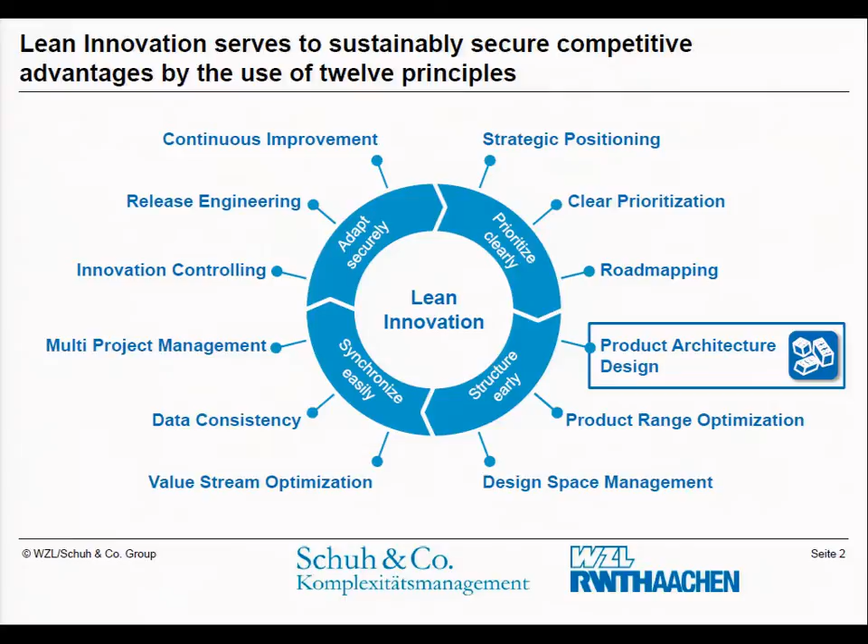Now, the entry picture is probably one all of you can show in your businesses. It's very typical - it's not necessarily a Porsche problem. In a way, it always goes in that direction. When I started my career on this topic with my first research project, in those days Wolfgang Reitzle was the head of R&D at BMW.

Even 29 years ago, he said our topic can't be purely a reduction of variety. We have to be those, at least as BMW, who can provide these more efficiently and effectively. And that is the story since then. As Greg told us already, I'm completely convinced.

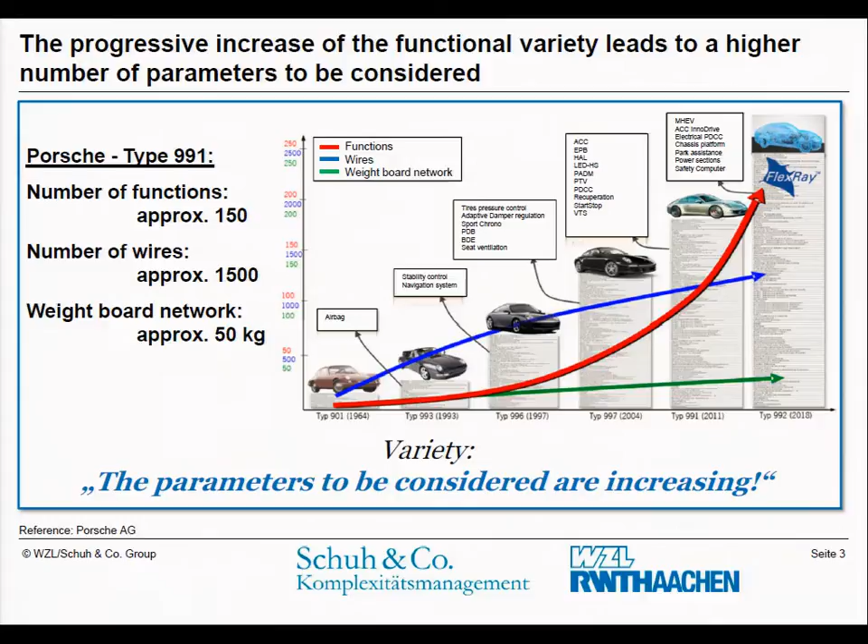That is not only the message for premium OEMs, I think it's the message over all the market. Most of them earn their money with products that are end customer configured, which basically means there is a lot of variety you can choose from. All these figures are not surprising for you, as you are all experts in that field. I have a very similar diagram here, like Greg showed you.

That's what we learned before. A lot of companies still have to optimize that. It's probably been a thing for more than 10 years. And the good ones, like we just learned from Ford, know how to do that. But in my assumption, I'm in that market long enough. 70-80% of the players in the market do not know how to do that, like we learned from Ford Motor Company.

The control of complexity would mean that you really, on purpose, put products together out of modules, and that is the capability to really have a configuration space which is designed on purpose. In our understanding, a new product should always start with positioning in the configuration space. And later on, of course, you need that configurator - first the R&D configurator, and later the market, the customer's configurator. That is very important. The configuration rules in many companies are not clear and completely set. And if they are not complete, you can't say you have control over the configuration space.

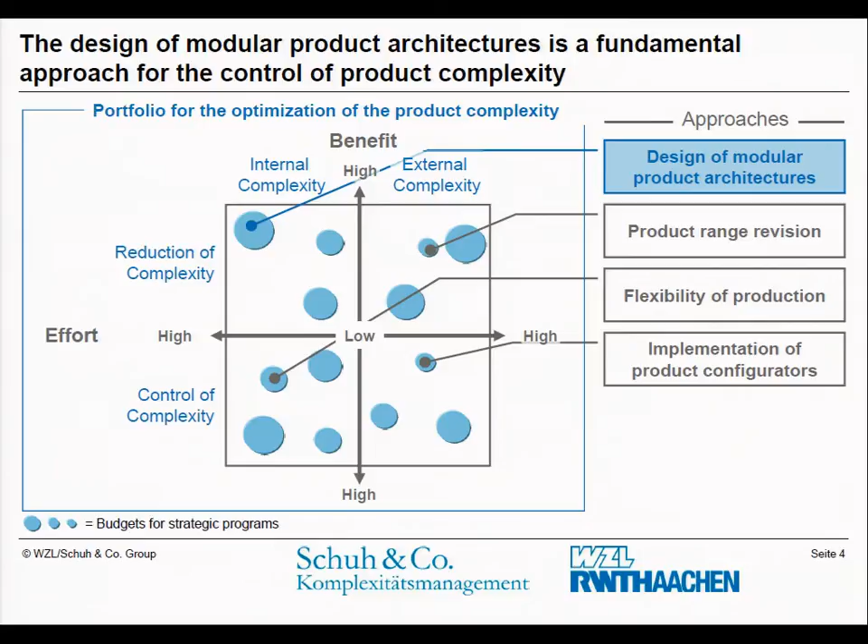Then 2008, 2009, the idea of pure electrical cars came up, and we thought that is a significant technology change which offers the opportunity to really do it properly from scratch. We said, we now build a new product type, and we start not with the first design of the first car, rather designing an architecture. So we designed, or configured, an architecture of cars from a very small one, a 3-meter city car...

...to a 4.6 meter very light vehicle, you would say, very light commercial vehicle. And the important part for us was that we thought an electrical car - citation is Utterback - will not have a dominant design within the next 10 to 15 years.

So that means, to a certain extreme, what Greg said, the number of pieces you can sell from one type of car will be significantly lower than what at least the auto industry is used to have. Very small numbers of pieces and no real scaling up in traditional volumes.

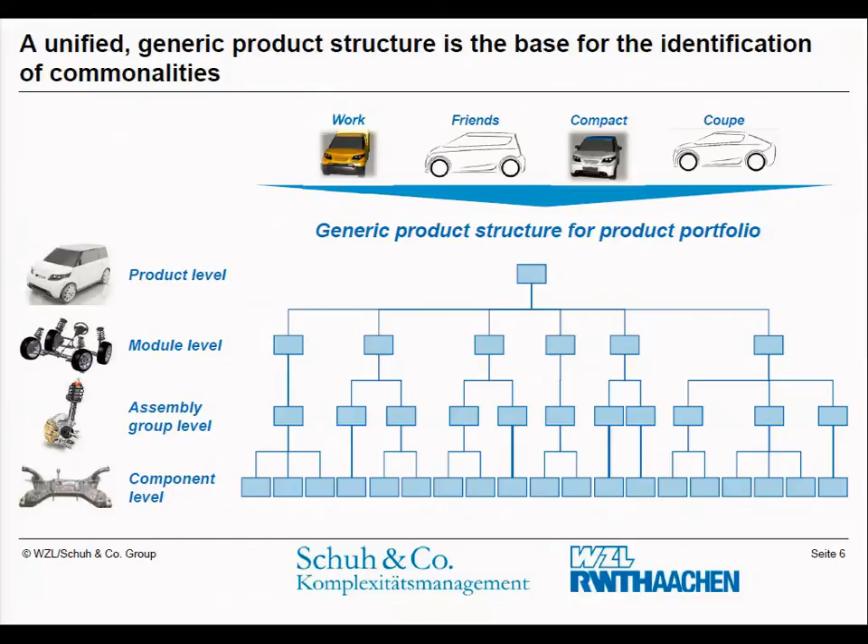And that is even necessary, very much necessary, if you don't start from scratch. In our case, we were kind of forced to start from scratch. And if you do so, we recommend to distinguish 4 types, or 4 levels, of commonality.

The overall, the long-end goal of commonality - physical commonality, having the same parts, having standard parts - is desirable, is necessary. If you can achieve that, very nice. But if you can't, it makes very much sense to at least conclude on the level of technology commonality. So parameters, geometry can be slightly different, but the design and the functionality or the technology you use can be the same, can be similar, can be reused, and that is part of return on engineering.

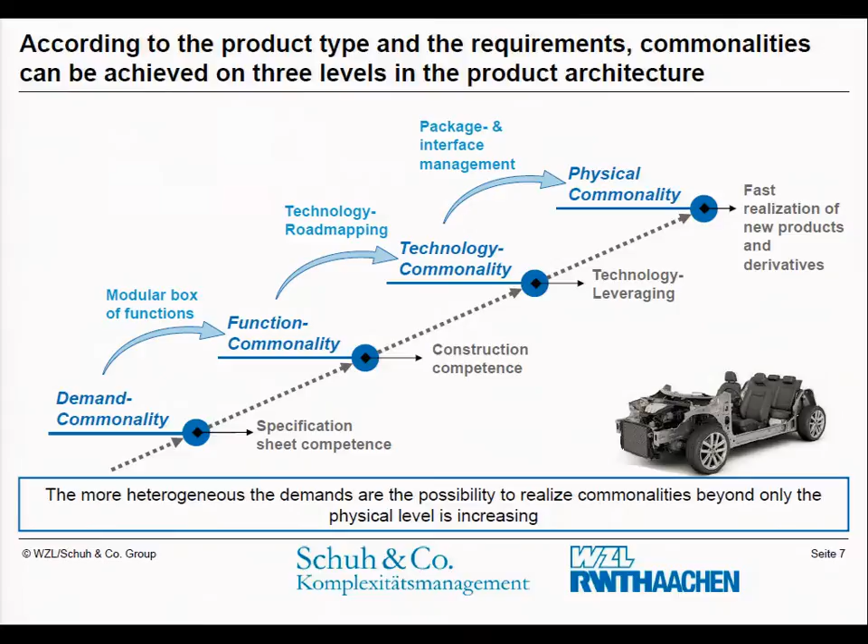That StreetScooter that you have seen - we call our car and our company StreetScooter - for instance, we have approximately reduced the development time by 50%. So it was a bit less than 2.5 years to get the series production ready, from scratch, from a not existing company.

StreetScooter is a company of 36 people and 80 suppliers involved that never worked together in that way before. They worked in some other OEM projects together, but not in that constellation. And we needed 30 million euros to get that car ready. We will produce 20,000 of that. That includes the production facility of the final assembly. And the comparable number would be 300 million at least of investment if you do that in a traditional infrastructure.

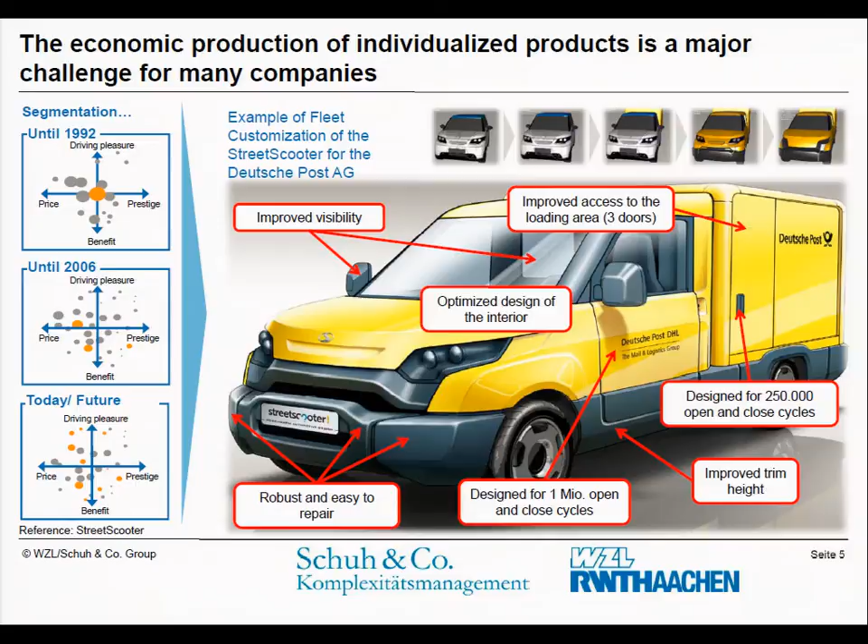That was just to prove that it works. We promised that with our concepts, and typically as researchers we were used to some people at least believing us. This time unfortunately we had no real believers, so we had to go a step or two further. The idea behind it is to find the driving parameters, the constitutional parameters of such a modular platform.

We could easily use the example of the modular transverse platform of Volkswagen, because that is one of the big strengths of the platform — they found the one most important constitutional parameter, which is even an artificial parameter. They call it the technical length. This constitutes all 40 different cars from Scirocco, New Beetle, Seat Toledo, Skoda Octavia, Golf, down to the Polo, up to the Passat. The constitutional length is the distance between the front axle and the bottom part of the accelerator pedal, which is a very artificial measure, but it constitutes that important internal part from the body inside, very customer-oriented, and the front end of the car.

All other parameters are not fixed, and there are intervals in which you can have variable dimensions in the complete length, even in the width of the car. That's first shown in the modular longitudinal platform of Audi, where they were the first to really offer two dimensions of cars with exactly the same architecture. That means the Audi A6 is 5 centimeters wider than the Audi A4, but the complete rest of the architecture — Mr. Alders can explain that even better — including all components in the axle are the same. Never done at that time before.

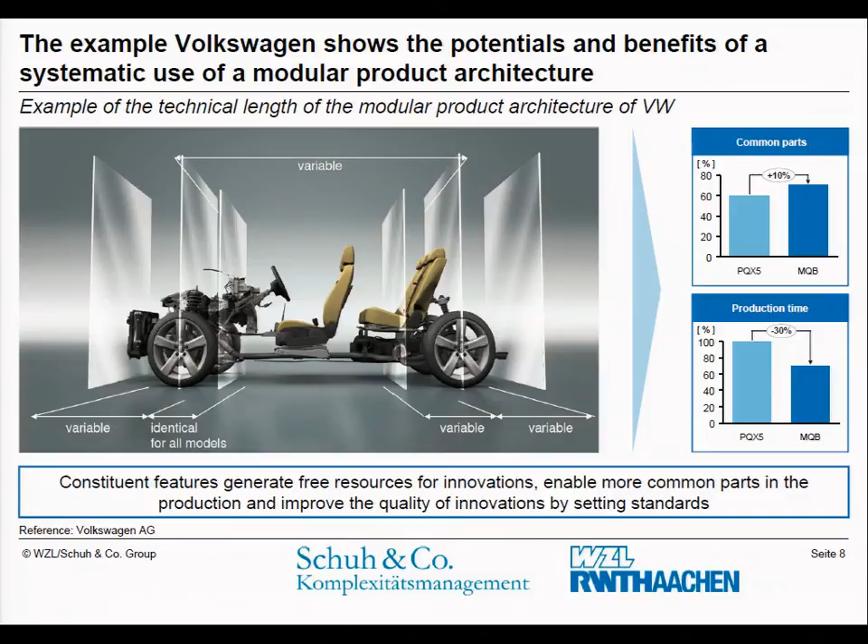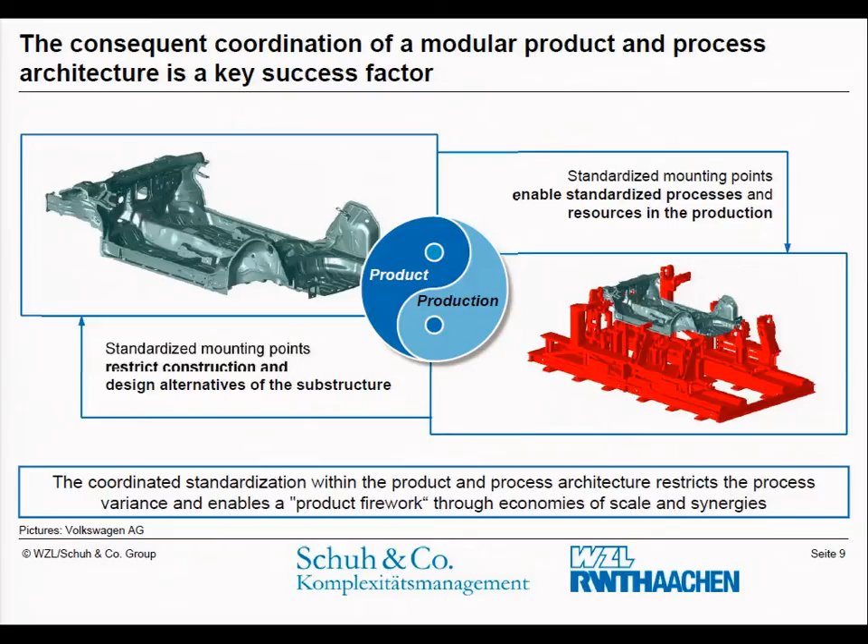This is 15 years old. The potential is very clear, and back to the basic idea, we should come from the commonality of technology and processes. So all the tools, dies, processes and technologies should provide the parameters for the design of, for instance, the body structure. This is a yin-yang approach where we should probably look earlier and more intensively at the production parameters which are relevant to constitute the product parameters.

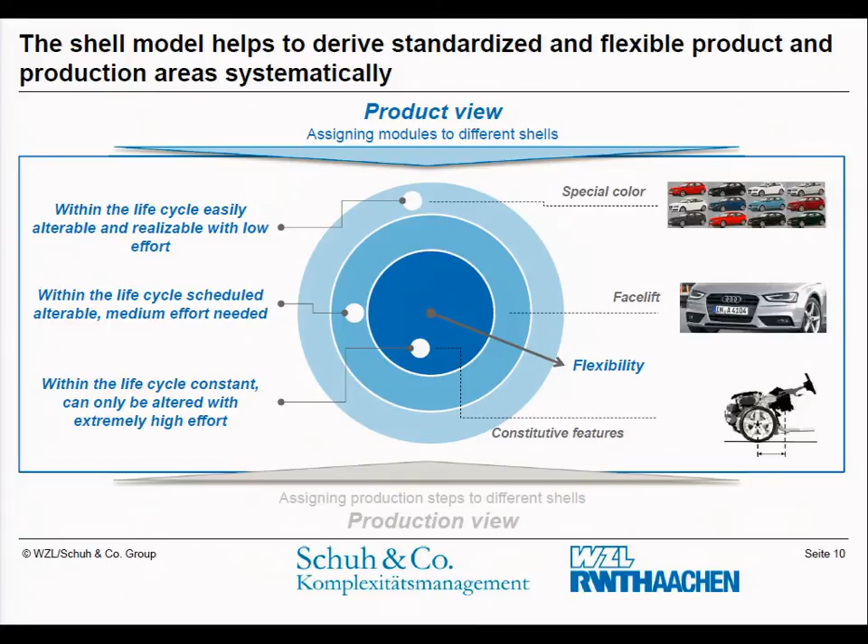Just to show that — and it's the same story that Greg already told you — the important part is to have that kind of onion peel approach, where in the very early stage, in the early specification of a product, you define precisely what is in the inner circle: what are the rigid and robust parameters and parts that you don't want to alter over lifetime. The next onion peel is those where you have at least an interval in which you could alter some constitutional parameters over lifetime, and on the outside, where you even want to change quite often the design to keep the product fresh and modern. That's a bit of an approach to how to distinguish that.

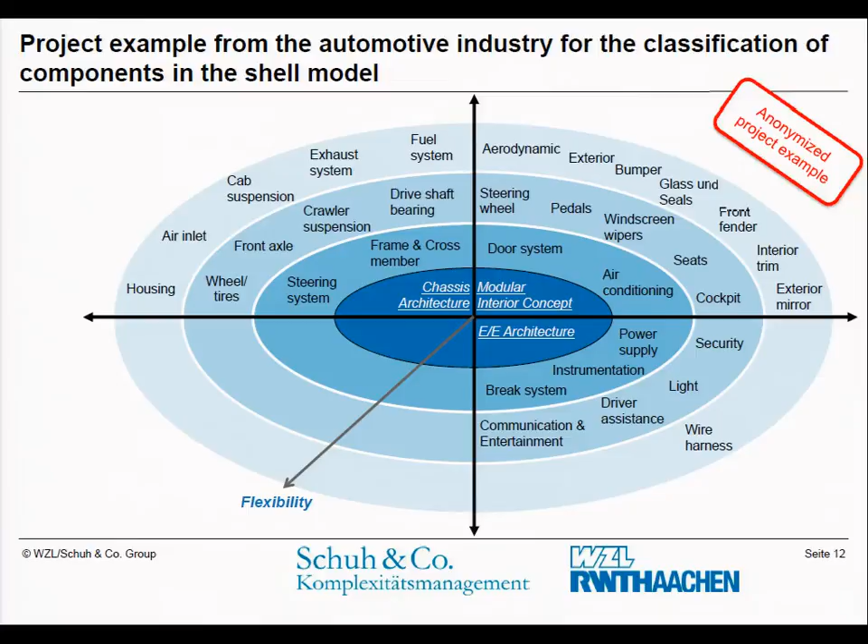Here's an example of what typically should be on the internal part. For instance, we do that with the EE architecture, with the modular interior concept, with the chassis and body architecture — things which should be in the inner circle. And all this is linked with rules, modular constitutional rules for each of these components or sub-assembly groups or functional groups. It's very important to set that so that you derive from there where you gain the economies of scale and commonality on the process side.

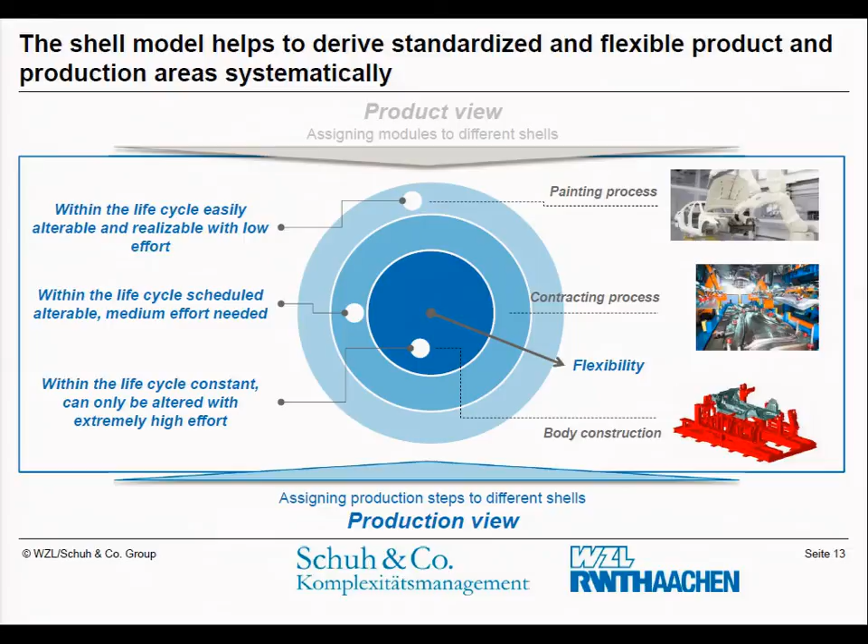So the same onion peel model results on the process side out of that product commonality described on that onion peel model. There you can easily see where you can change things and where you really have to freeze things.

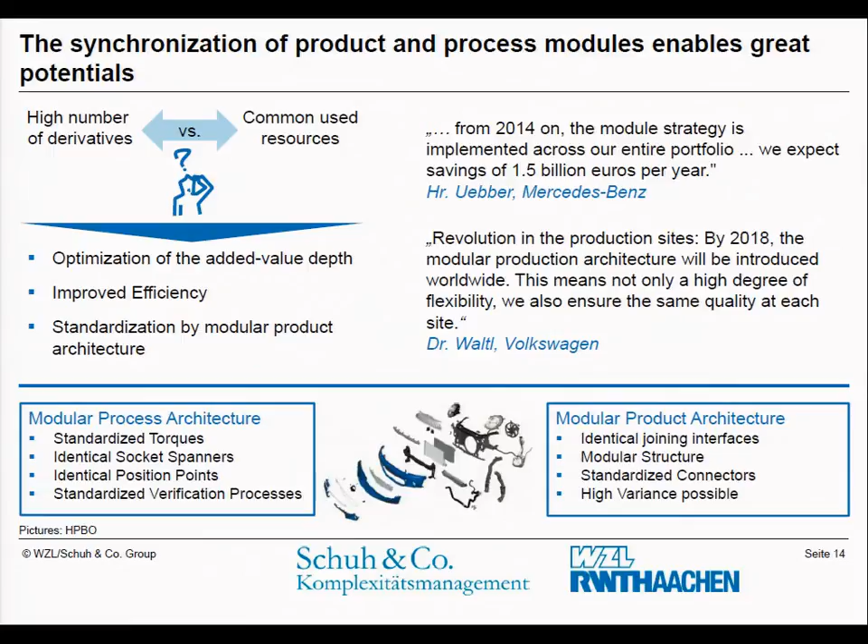The dilemma is very clear — we learned that before, I hope we discussed that all through the 2 days. High number of derivatives, common use of resources. It's always this optimization of added value depth — what do you do on your own, make or buy, improved efficiency. But what I want to stress is the very intensive negotiation between the modular process architecture and the modular product architecture.

For our StreetScooter, for instance, this is a typical body structure, how it is conventionally fixed with spot welding devices. What we did instead, we used a forming device from Trumpf, which you can see here. They advised us to use these K-Nodes, as they call them, where you can form all these metals not on an individualized expensive tool, but on a standard bending and pressing device. That's a standard combination which we finally used to form the part.

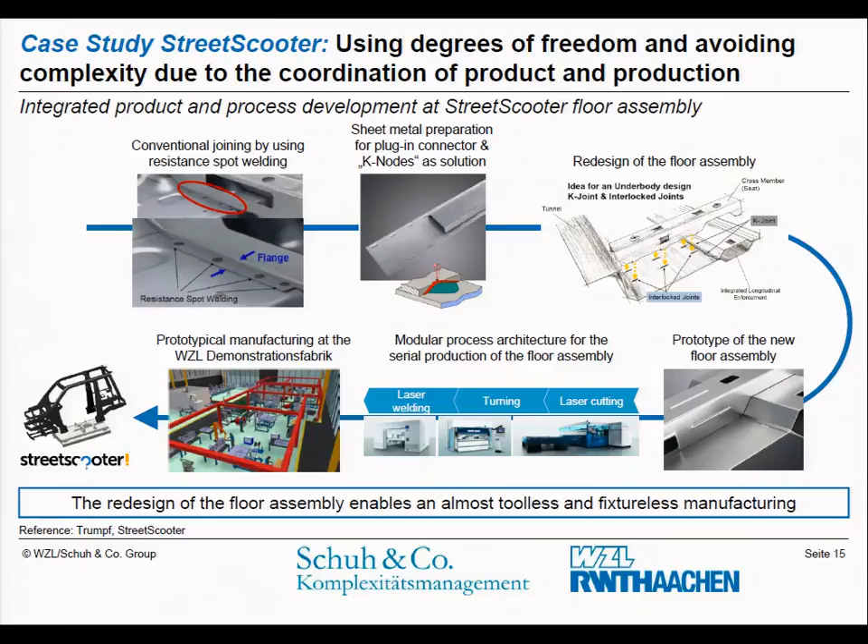Instead, we formed that bottom part like this, which you can alter from piece to piece now. You can have a stronger version for higher load, and in the end, what is the key of my story — almost no tool, no fixture, and no investment in type- and variant-specific components.

A little picture from something different, not car business, another project - a white goods product. They thought they had a huge family, a world provider of white goods, and this is just an overview about the different technologies they had in these different areas.

Presses, welding, different manufacturing processes, gluing systems, assembly lines. This is not the number of assembly lines they have - they have, I don't know, 18 locations in the world. It is the number of different types of technologies. And the number of different types of products is significantly lower than the different types of technologies that are used.

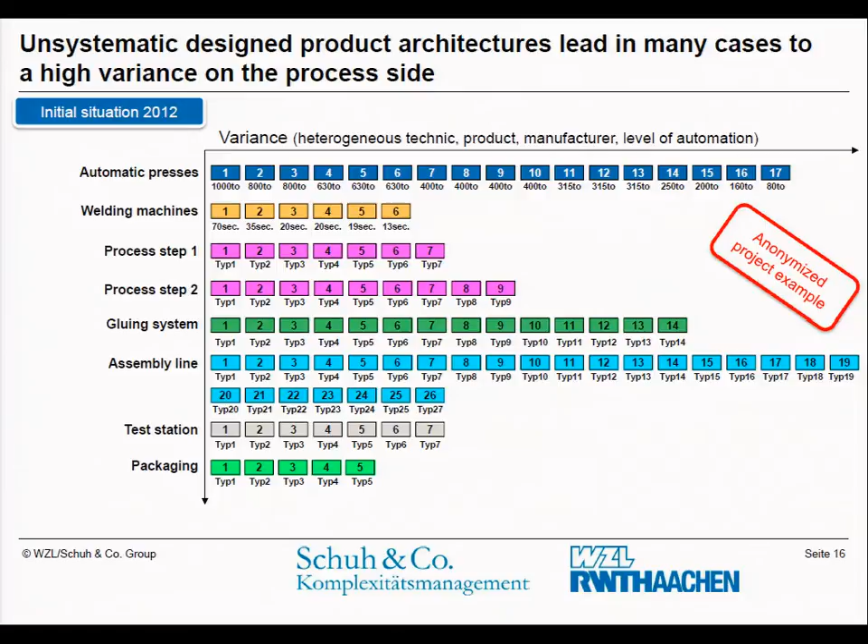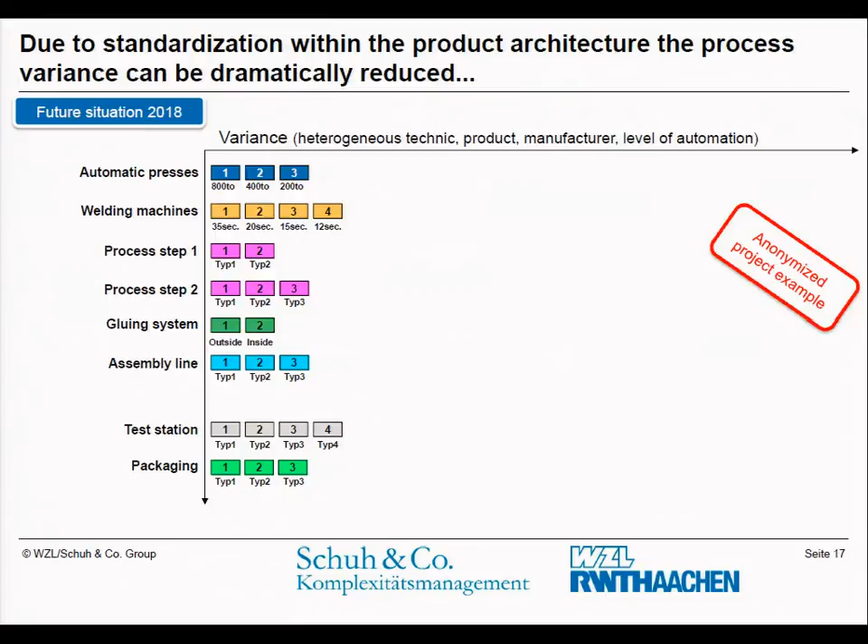So the benefit, the scale effect you earn on the production side - and when we were ready, that was the result. I want to stress that, with no extra limitation on the product side, on the product variety. So the difference between this and that was of no use, of no value on the market, on the customer side at all. This is the potential if you look from the process side on these subjects.

Or in figures, coming from 91 different technologies to 24 different technologies. These potentials nowadays, not 15 or 20 years ago, are still around 60, 70, 75%. So enormous potentials that we can achieve.

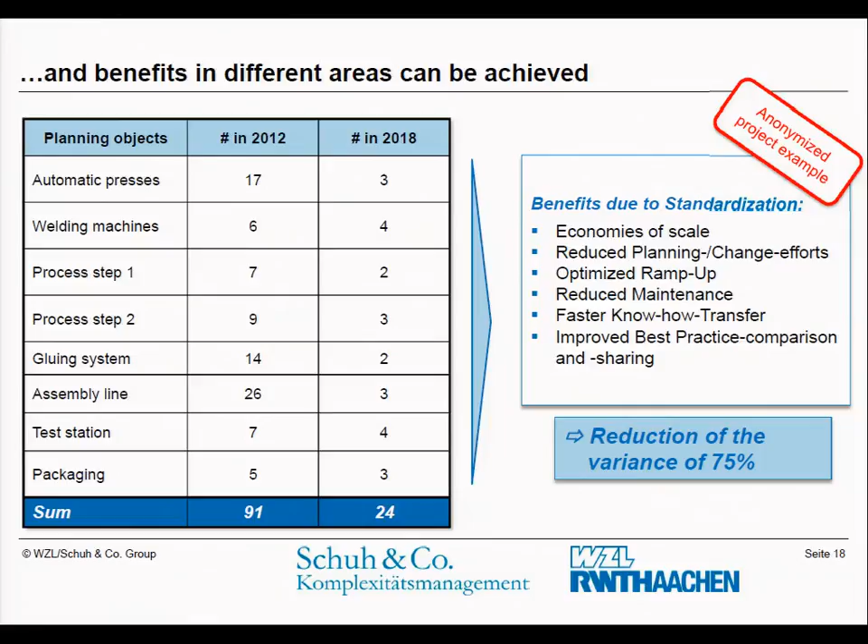My last statement will be: don't leave it with the PDP, the product development process. You need an architecture. As you learned from Greg, and I'm in the same line - stop ideas of world car or world product concepts. They very seldom work. I mean, if you tell that to the Porsche people, they say in our case it works.

But I say, 100,000 - that is nothing for Ford. I mean, 100,000 cars as a world car supplied to the world is a different story. So these exceptions to the rule may occur, but no world product, no world car concepts will be of help. The world architecture is of help.

And that needs to be developed and maintained like a product. So additionally to our conventional product development process, we need a product architectural development process - which we also do not just develop once. We have to maintain that, we have to improve that, and we have to make sure that it fits.

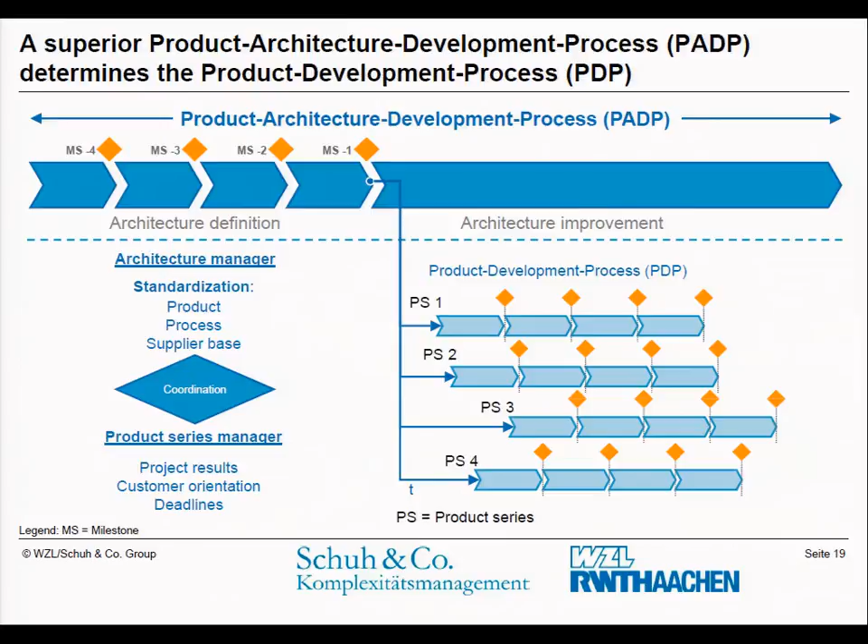That means all those roadmaps are important, and the most important roadmap in the future is not that roadmap, it's that roadmap. The commonality, the maximum of commonality, can be driven out of the modular roadmap.

And from there, for instance, occasionally, in your days Mr. Allers, the Audi TT appeared. Occasionally - the Audi people hadn't even the order to do it. This MQ, PQ34 came up. They had to do the A3 out of that, the Golf platform.

And then they said, well, we don't like that BMW Z3 or Z4, and we have nothing against it, so they said, okay, we take that platform. And then they asked for a budget and the official acceptance that they could design that TT. And they didn't get it.

Have you ever heard of submarine R&D projects? I think it was, for a period of time, a kind of submarine project, which they couldn't have afforded if they wouldn't have had that platform. And it was, as you know, a very successful thing.

So what I want to state is it's not just the important relation between product, program, roadmap, and production technology roadmap - it's also about the module roadmap. And as Greg said, production site roadmaps, because even the next plants, the next generation plants, will be significantly larger than those in the past.

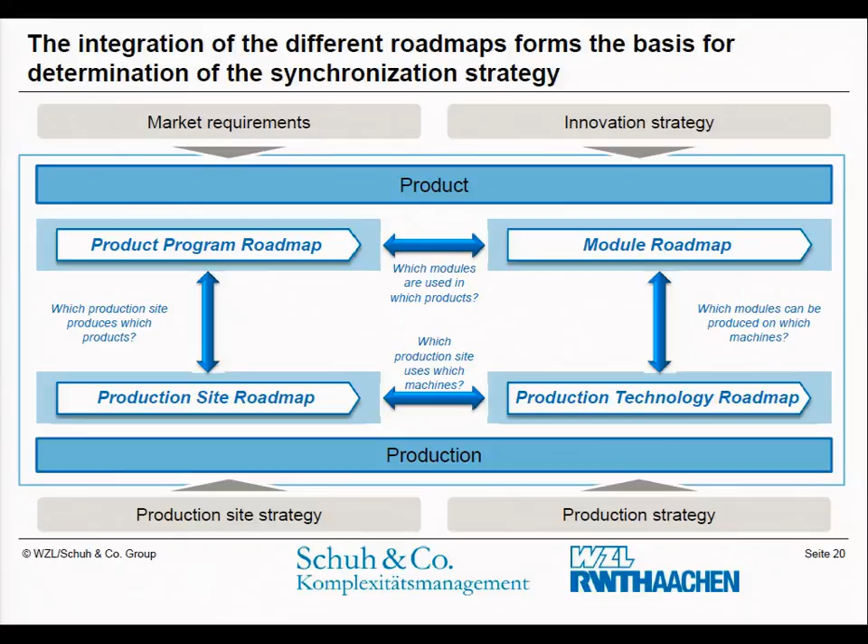And they will concentrate more on product lines like Ford does it. But nevertheless, they have to be designed such that the next, or the next but one, plant you design always has to contribute so that all existing plants must be reduced in complexity through that new plant.

I conclude: the complexity topic is not new, but its importance is just now increasing. The consequence means coordination on the product, on the modular product side, but also, and at the same level, on the process architecture side.

And we advise using such an onion peel or shell model to systematically derive that architecture, standardized in distinction to the more flexible zones. We also advise establishing an official PADP, product architecture development process, like the product development process. Thank you very much.